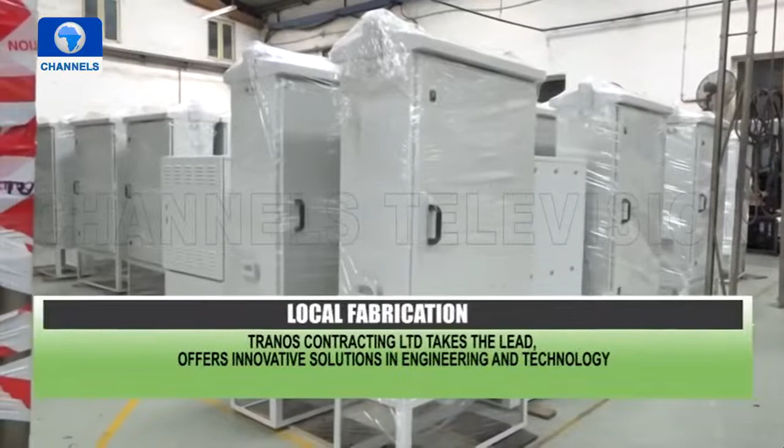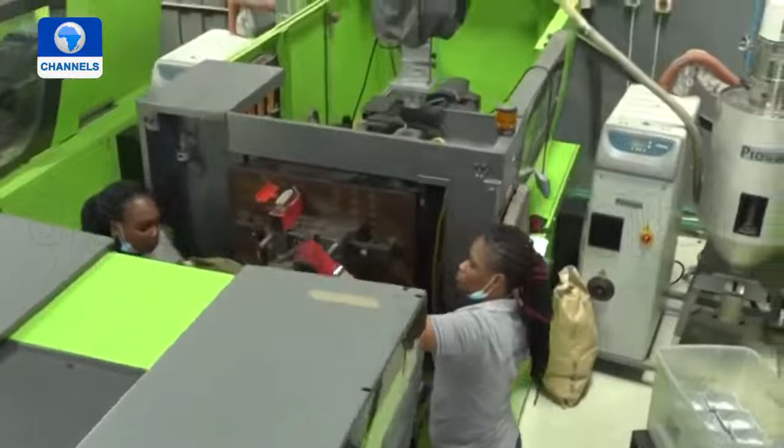Tranos is an engineering and manufacturing company adding value to lives through innovative solutions. Customer satisfaction, they say, is a key factor of the company's quality management system. From the deployment of high-precision CNC machines and the engagement of competent personnel to the institution of standard error-proof processes, Tranos guarantees the quality of its products and services with a quality management system that is certified to meet the requirement of the ISO.

9001:2015 standard. The Managing Director and Chief Executive Officer of Tranos takes the team from Channels Television down memory lane as he explains how the company started.

Tranos, we started about 14 years ago, and the whole idea of Tranos from the beginning was to try and set up an organization where people can come together and be able to provide value for customers. So the overriding idea was to be able to provide value to customers.

Looking at staff strength, I think we probably started with 3 people, including myself, of course. So we had a small office then in VI. We started by trying to do things in terms of project management and some procurement that we're doing for oil and gas back then.

Now, we wanted to provide value. So what has driven us across time to date has been trying to find out where can we provide value? What value can we provide for customers? So by asking and answering that question, we've come up with ways, we've learned a lot of things, driven by knowledge, to invest in people, invest in equipment, invest in processes that can help us provide value. So that basically covers what has brought us to where we are today.

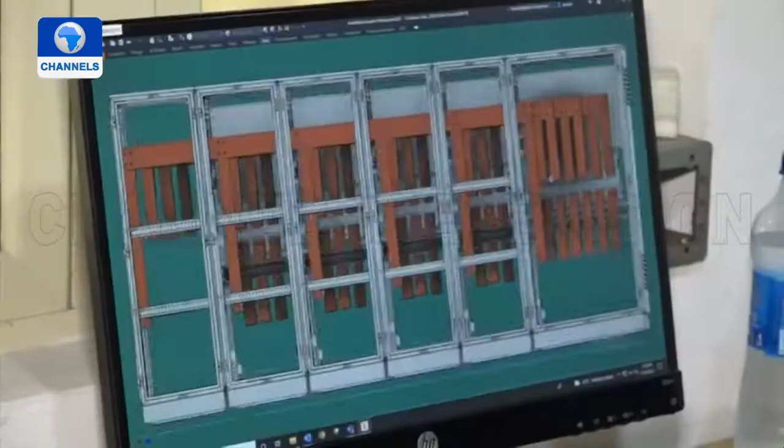In terms of staff strength, I think as of today we're about 170 people, because we do have, at times we go as up to 200, a little over 200, when we have installation jobs or repair to do for customers on site. So we are an engineering and manufacturing company.

And what that means is that we design things and we manufacture those things for customers. Those things will revolve around enclosures for various applications, both mechanical and electrical applications, power distribution equipment, that's electrical panels, electrical control panels, protection panels of various types.

We make gaskets mainly for oil and gas and petrochemical applications. We make cable trays and ladders. We make warehouse racks for storages.

Now, all our products are based on knowledge, meaning that you study what the customer needs, you study where the pain point is for the customer, and then you design a product to solve that problem. The drive was to solve problems.

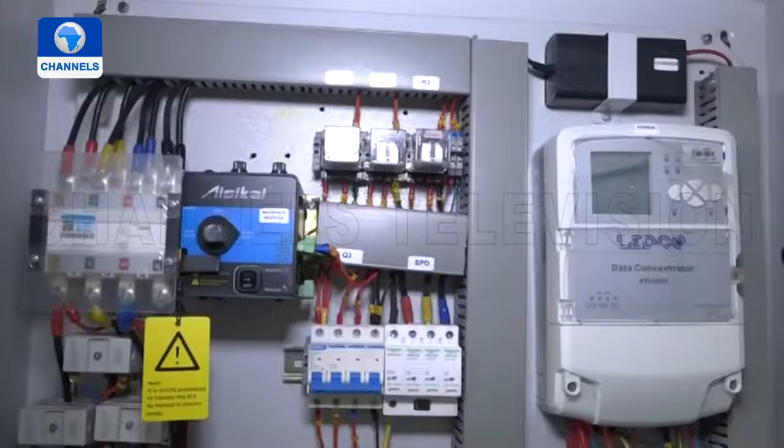And when you're trying to solve problems in a sustainable manner, meaning that you want to be able to do this for years to come, you need to build a system. That system will involve people, it will involve processes, and it will involve a lot of knowledge. So the drive was basically to provide value, and that drives everything we do.

We want to provide value. That's the first thing that comes into our minds when we're trying to deal with things, when we are speaking to customers or when we're trying to respond to customers.

Because someone walks in and says, 'Oh, can you do this for me?' The thing he's trying to tell you is that I have a pain. So what we need to do is to find that pain and solve the problem. And that's basically it for us.

It's been quite good. In fact, up until a few years ago, we never really used to do any marketing or sales. Practically all our sales would be from word of mouth and referrals. And that shows you how customers view what we've done for them. So basically, you do something for one person, he speaks to another person about it. And in fact, we've had people come to us with problems that we hadn't solved for anyone else before.

And that's actually how our range of products have grown. We've grown on the basis of identifying pain points for customers, because someone comes and says, oh, I need a certain kind of enclosure. When you build it for him, you begin to realize that there are many others like him who also need that solution. So that's how we've grown.

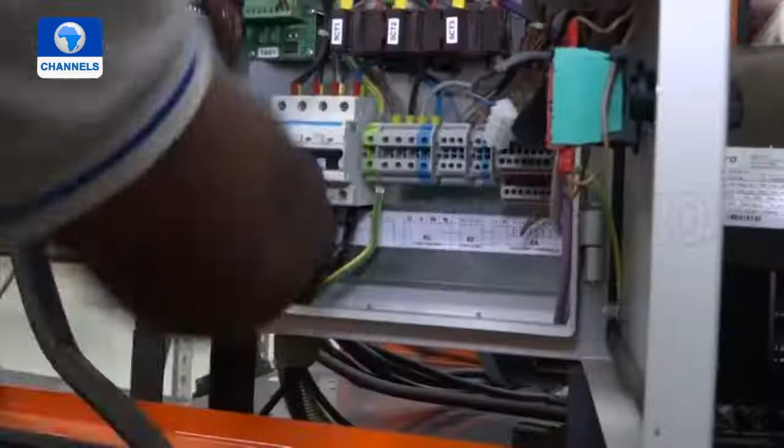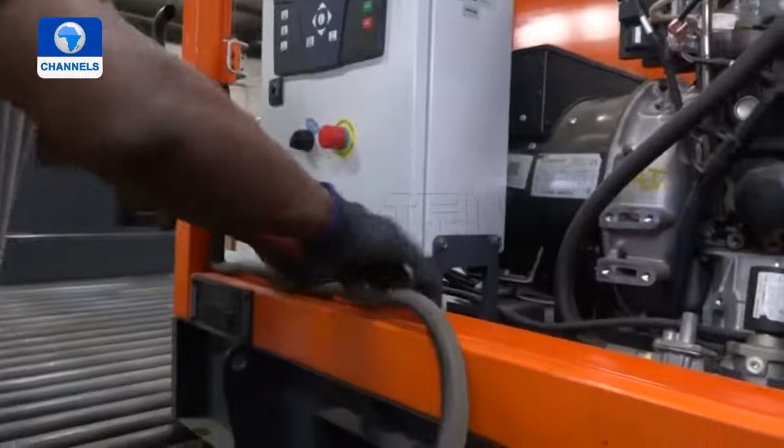The Nigerian power challenge is not a technology or a technical problem. It's a commercial problem. It's similar to years ago when we had NITEL, and there were issues with communicating. What changed wasn't a new technology, really, per se. Yes, GSM was relatively new then, but that wasn't what changed. What changed was that the industry was commercialized such that it was able to attract enough investment to solve the problem. Similarly, in the power sector, what we have is there are no commercial incentives for a lot of investments to come in to change what we have.

So it's not really a technology issue where we can say, okay, we can come in. And yes, we are doing that in a way with the gas generators that we have, which easily replace diesel generators and give a better return on investment at the end of the day. However, it will not suffice for the whole range of demands that are available for power consumers. So bottom line, the Nigerian power problem is a commercial problem, not a technical one.

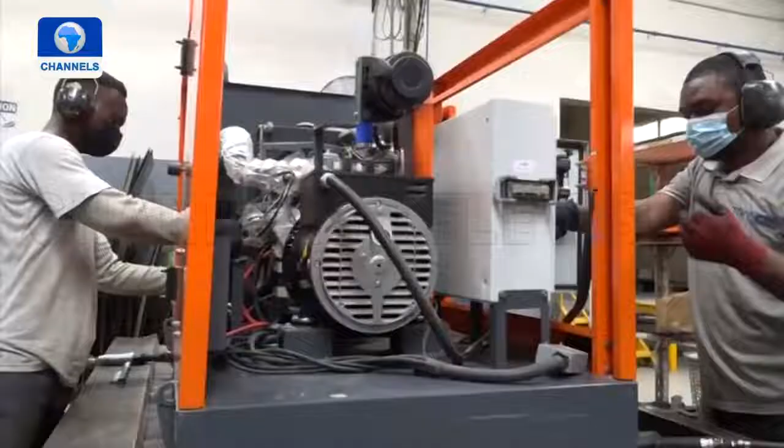From an initial staff strength of 14, Tranos now boasts of well over 100 workers, as the managing director speaks on the services provided by the company.

We don't work with short-term benefits in mind. In a lot of the things we do, we could have easily just gotten a partner or manufacturer somewhere, say we make warehouse racks, get a warehouse rack partner in Europe or Asia, and all we do is receive orders and import. That's an easy way of doing these things, and you make some margin on it. It's business. But we decided that rather than do that, let's learn how to produce these things ourselves and even improve on what others are doing outside. Looking at it from that perspective, I think that's what differentiates us from a lot of people.

Depending on the market or product category you're looking at, we compete differently. But one key thing we hold is that I don't just want to supply you this thing or solve your problem, I want to understand how you will use it. I want to understand how I can improve the product so you can have a better time using it. That clearly stands us out from everybody else, because we have that dedication. It's not attractive because it doesn't make money for you immediately. It's a long-term thing, because we believe that process will get us to provide better value for customers and help us grow as an organization.

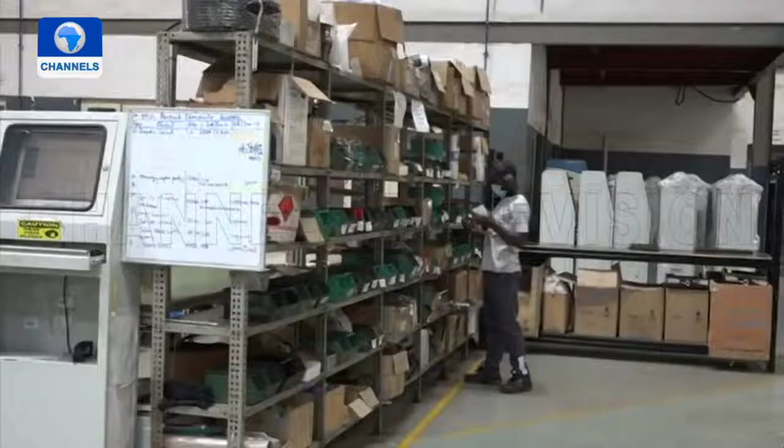Challenges in business, especially in an environment like Nigeria, are continuous. So I'm not going to say I've solved some of the problems, but I'll think of some of the lingering challenges we have. For me, the biggest challenge would be supply chain.

For a manufacturer, you're basically getting input materials, raw materials, and either converting them into something else or incorporating them into an assembly. If you're a manufacturer, one small pin missing from the full bill of materials of what you're producing means you can't finish that production. In a country like Nigeria, where there's limited availability of support industries, meaning industries that can manufacture some of your own inputs, especially in our case, it means we have to bring a lot of things in.

The challenge is that importation and clearing of goods is a lot of pain. So that's one of the major challenges we face. We try to do what we call a lean manufacturing process, and in lean manufacturing there's another concept called just in time.

You go to a factory, say in a place like Japan, like one of our partners, Yanmar. They don't keep inventory for more than 4 days, meaning what I need to produce on Thursday arrives in my factory on Monday. It doesn't stay in storage more than 4 days. We can't even dream of that. They can say that because even if the goods are coming into Japan from, say, Germany, they've planned it such that it will arrive 4 days before. That also means they expect clearing of goods will take probably 24 hours, and it always takes 24 hours.

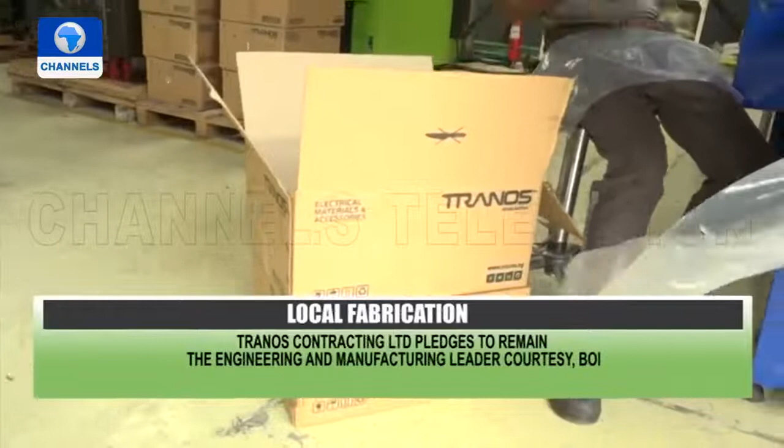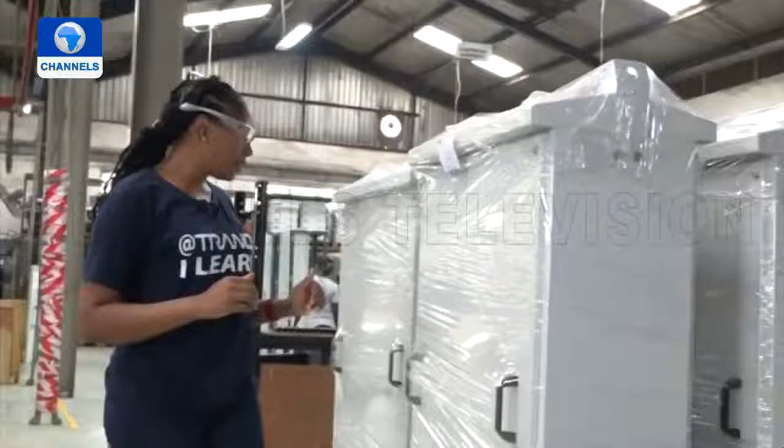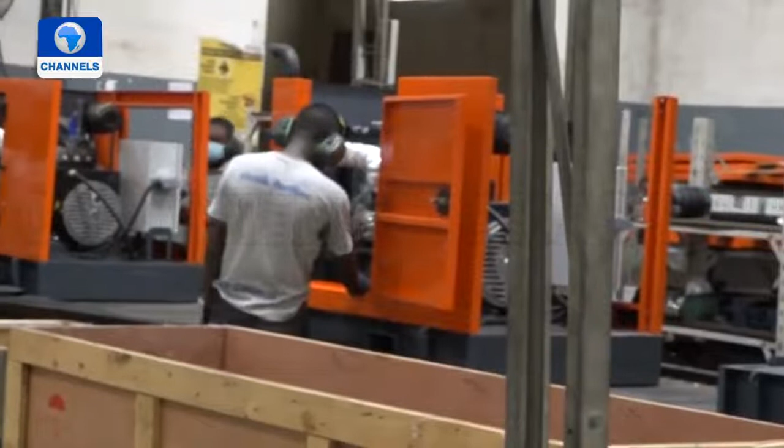The production manager outlines the various stages. This is a fabrication company, and this is where everything comes together. In here we have the mechanical assembly area and the generator assembly area. Over here they're assembling a TG1000 generator. They have four stages: stage 1, stage 2, stage 3, stage 4, where they mount all the components. At the end of the day, we put in the oil and then the testing is done, which completes the process.

On the other side is panel assembly. They are fixing the frames and all the side walls to complete the panel. It's actually an electrical panel, but for this purpose the client doesn't have the components here, so this is going to be installed on site. For what we're doing here, we're just putting the mechanical components together.

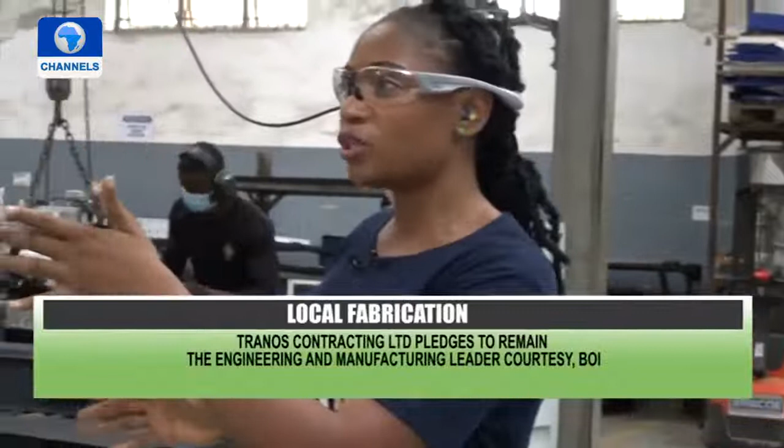Over here to the front is a finished product. We have all our finished products: a feeder pillar, wall-mounted enclosures, some freestanding enclosures, and some panels that have electrical components in them.

Over here we have our cable processing area. This is where we process our bus bars and our cables, and these components go into panels that we have to do electrical assembly for. So we have the capability to do electrical assembly in here, or we can also mount these components at the client's facility, depending on what the client wants.

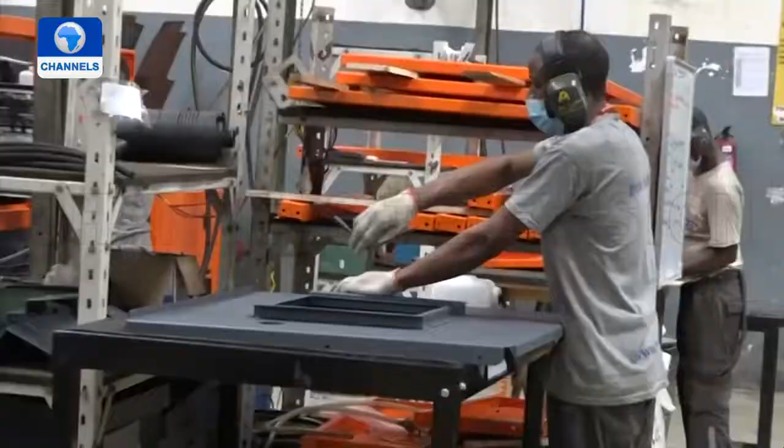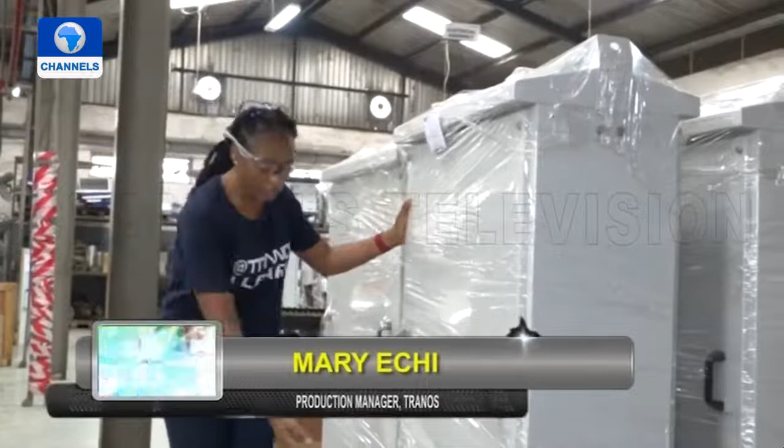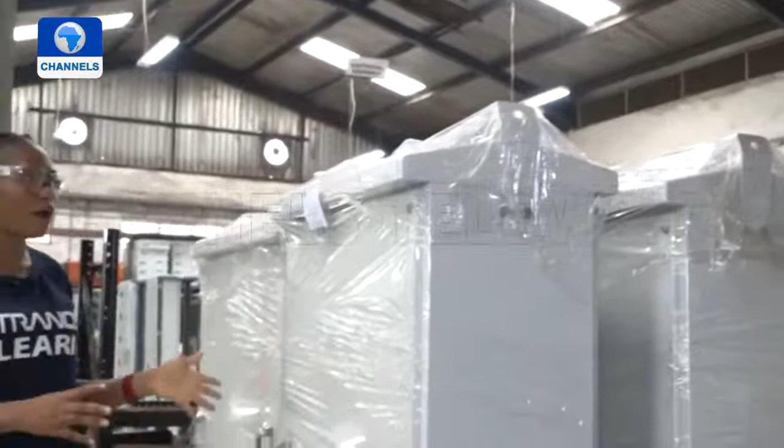The production manager outlines the various stages. This is one of our finished products, actually called a feeder pillar, and its application is for putting electrical components as well. So it has the enclosure itself, and it also has a stand for positioning the feeder pillar. We also have lashes here for lifting it. Now this is a finished product, it's wrapped, it's already approved by quality, and this is ready for shipment.

Over here we have our electrical panel. This is a 40 amp panel and it's ready.

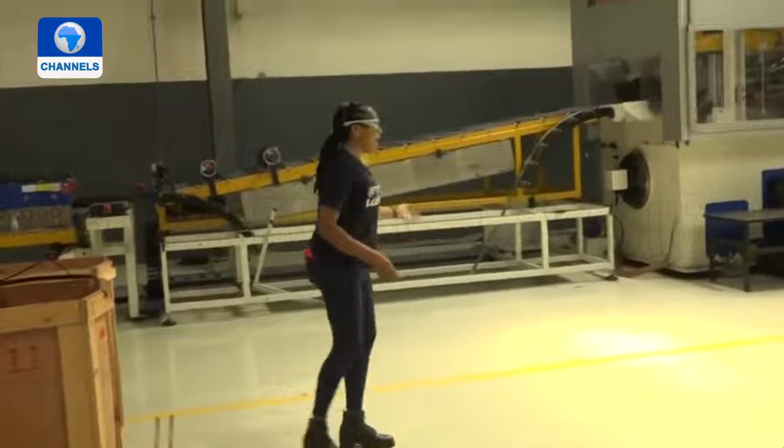From the design stage to the finished product, the production manager takes our team to another factory where finished products are displayed, and it's actually producing a tray right now.

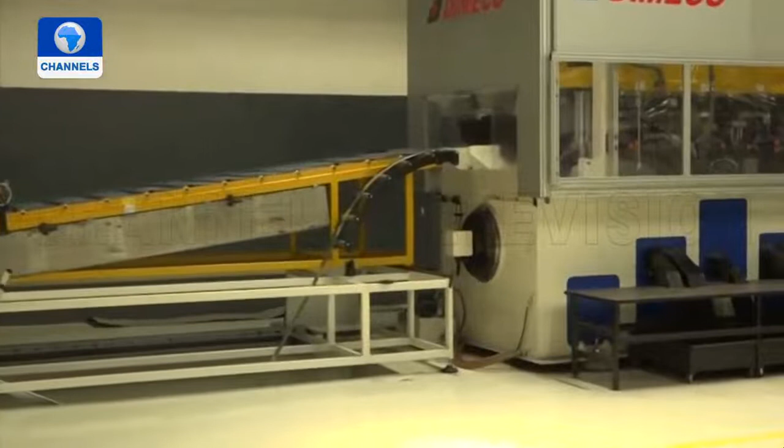So it basically moves through the line and goes through the roll forming unit.

Two senior members of staff of Tranos manufacturers explain their roles in the production process. We work with different departments: sales, production, quality, and supply chain. When we receive a request from the supply chain or sales team, in the form of a request for quotation, we prepare a bill of material in response. We have a GSS ERP system whereby we prepare this bill of material and send it to the sales team. Aside from the bill of material, we equally provide manufacturing drawings for the production team.

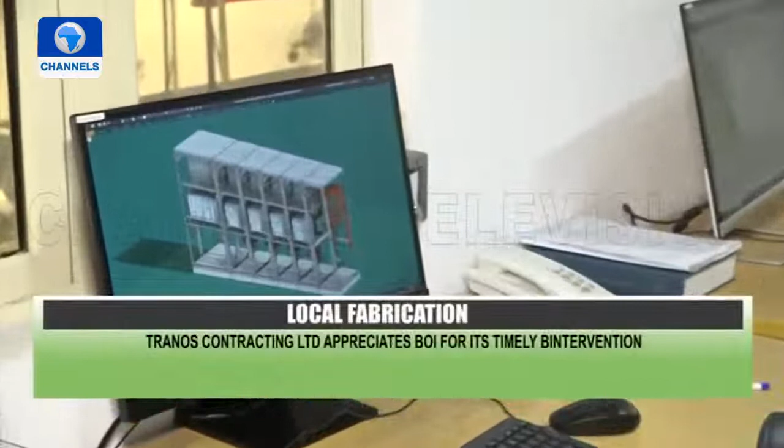When we receive a request from the sales team, we convert that request into a 3D CAD model, something like this. We have different product lines; this is one of them, a low voltage switchgear that was modeled based on the client's request. We work with our in-house electrical team, who give us a schematic and a component arrangement diagram, which we convert into a 3D model. From the 3D model, we provide different drawings for the production team to produce.

Aside from the switchgear, we equally have other models. We use a couple of software: Autodesk Inventor, Autodesk Design Suite, SolidWorks, and Solid Edge from Siemens. So we have other product lines.

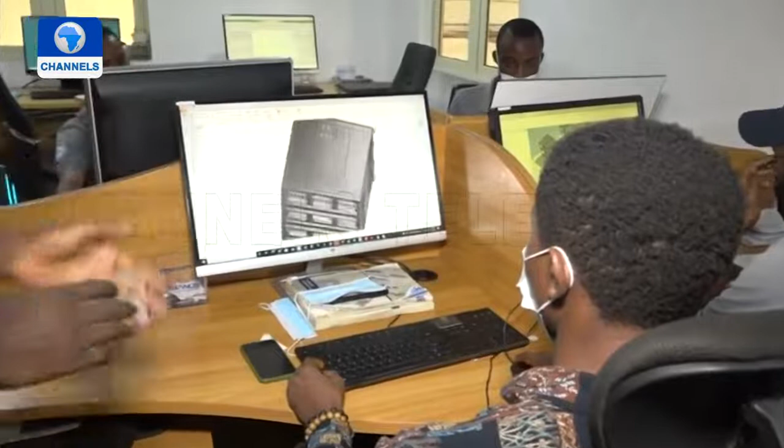This is a transformer enclosure done for one of our clients recently. The client brought their transformer in-house, and we took the necessary dimensions of the transformer. We did an analysis to check the structural integrity of the base, to ensure it can sustain the weight of the transformer.

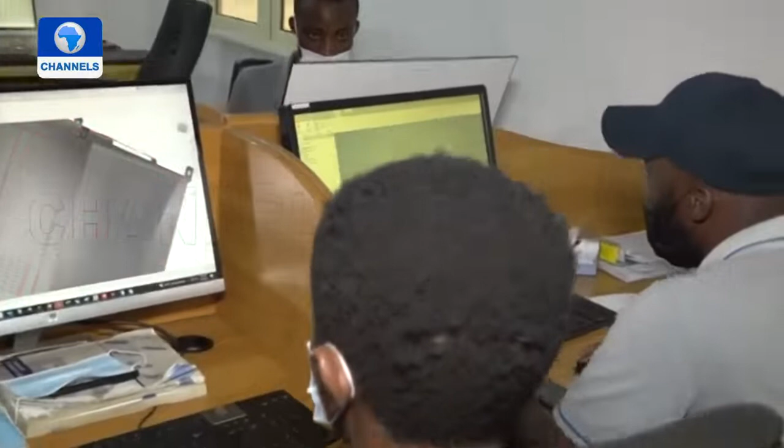This is one of our product lines, the warehouse rack, done for a client recently. We got the layout of the client's workshop and optimized it to provide the suitable rack for their system. So what we do majorly is work with client requests and provide engineering solutions for manufacturing, to bring the product back to life.

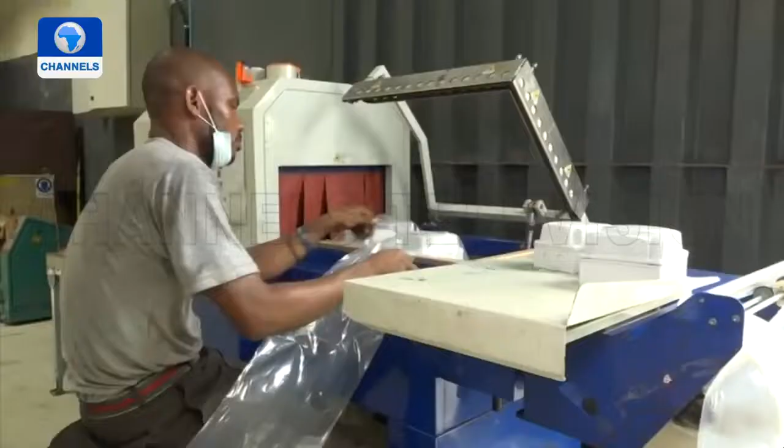With an extensive tour of Tranos Contracting Limited, the managing director speaks on their challenges, just as he appreciates the Bank of Industry for its intervention. In terms of financing, BOI is open, and we've worked with them now for about 4 years or thereabout, maybe a little more than that.

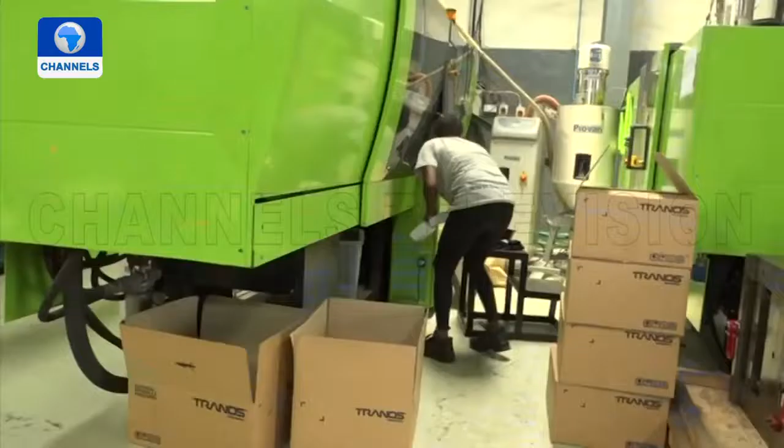Because of the professionalism I have seen there... a lot of people still assume it's not possible to get introduced to BOI and walk through the process to get your facility. But it does happen. So my advice to young entrepreneurs is: don't believe what you hear. Try and go in and try for yourself, because if you have a genuine business case, I believe BOI can support you.

I think it's a partnership, and they also understand that. So we are looking at the present, midterm, and future, and I believe this partnership with BOI will continue for a long time. We expect to keep working with BOI, so let's continue to build this partnership for the long term.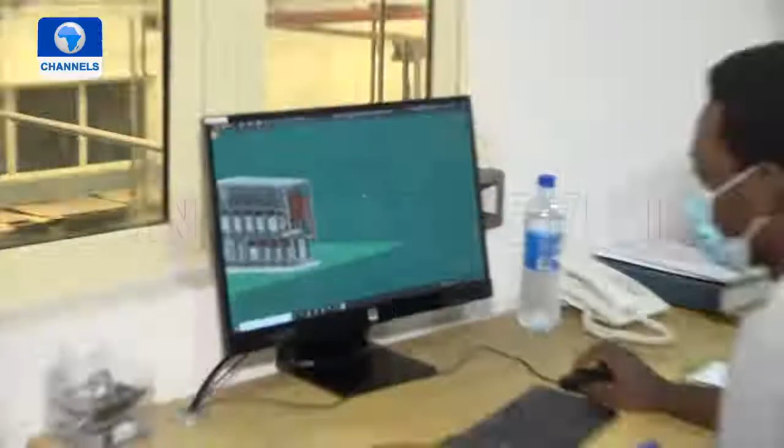Tranos is built on the dream of establishing an organization where individuals are given the opportunity to leverage their talents and abilities, joining these with those of colleagues, teammates, and state-of-the-art technology to provide world-class products and services. They pride themselves as an organization focused on bringing the best out of their workforce, individuals, and businesses through logical and creative thinking. That's why the company says it is one that thinks further.